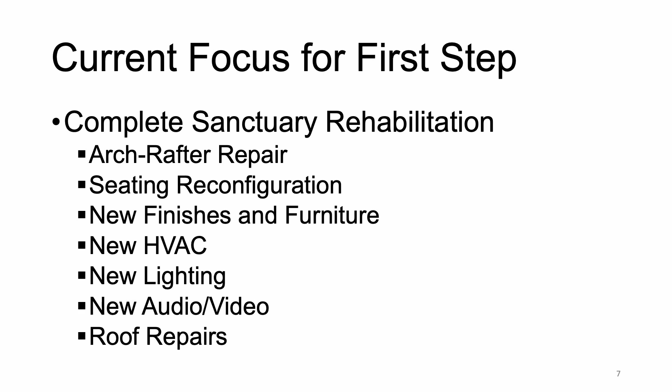That would include the repairs of the rafters, as we've discussed, but a new seating configuration that would have new finishes and new furniture involved, both seating as well as worship furniture, new heating, ventilating, and air conditioning system for the sanctuary, new lighting, new audio video equipment, and much needed repairs to the copper roof above the building.

This is a quick conceptual plan of what we're thinking about for the seating for the sanctuary, moving the altar space a little bit out into the seating area, creating more of a theater in the round feel.

Eliminating the raised altar platform, eliminating the planter area that's behind the altar currently, and providing a lot more open floor space for more functional and flexible use of the square footage we have.

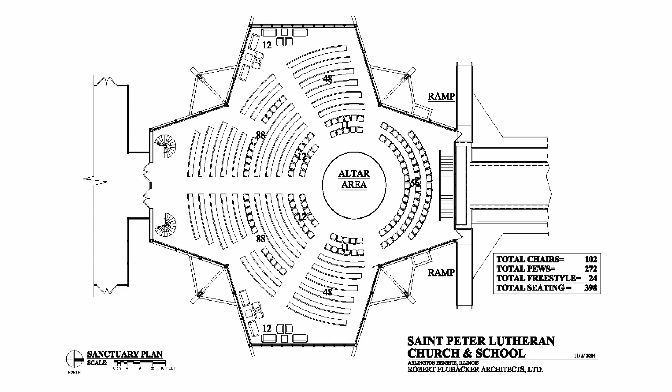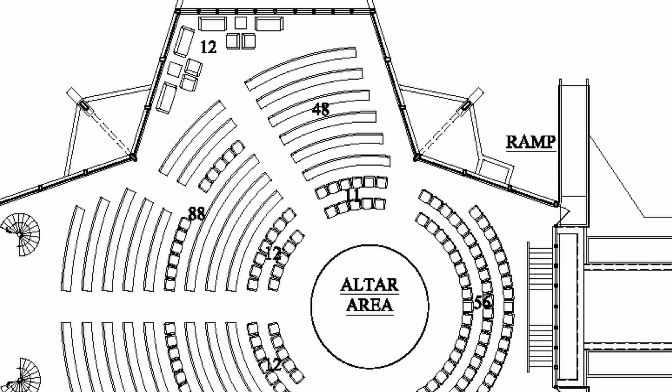If you look at the plan, there are 3 different types of seating involved. There are individual chairs that make up the first couple of rows of the main body of seating, as well as rows behind the altar area, kind of where the raised platform is now. There is fixed curved pew seating, and then there are also some leftover areas of space where we could do some more informal seating, where a family might sit together, or just more casual seating.

With that, we have also discussed a master plan approach to developing the next phases of work on the facility. The next set of slides is a very crude first attempt at what that master plan is. It's by no means set in stone, but I just wanted to present what the current thinking is.

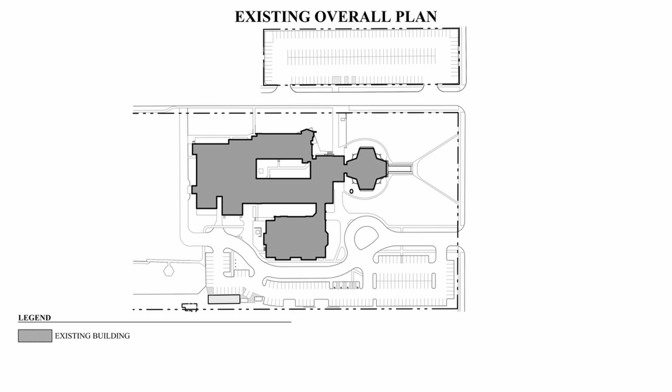The next slide shows what would be a potential next phase beyond that. That includes areas such as letter C on the plan, which would be a new lobby addition. Letter D is a canopy over that new west circular drive to provide a covered drop-off for people coming into the facility. Letter F on the plan refers to a new school wing addition, basically on the west side of the MAC and the gym.

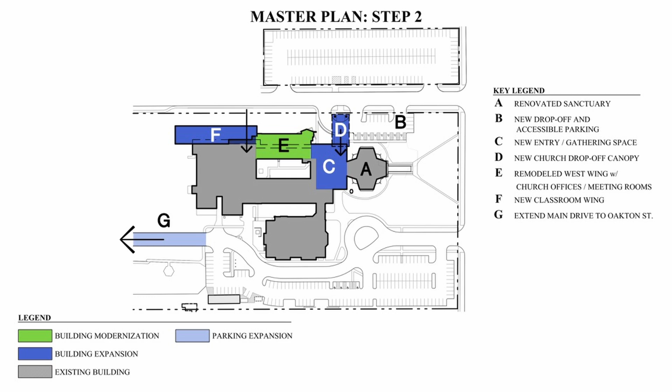We need to build this to house the students before we do renovation to any parts that they're in. Through a lot of discussion, it seems that it would be more practical and probably just as economical to build new classrooms rather than try to renovate the existing classrooms and have those students displaced for a year while those classrooms are being renovated.

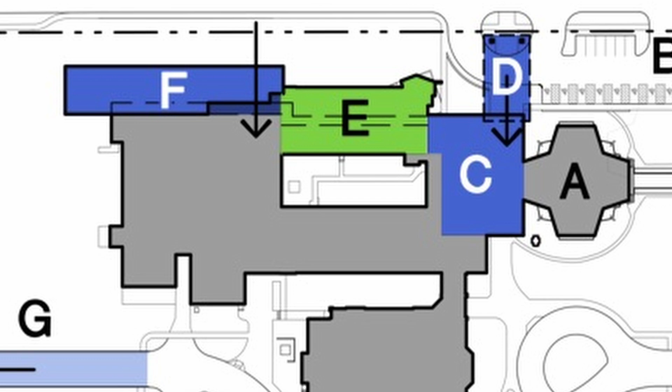Once that section F is constructed, it would replace the west wing of the school, which the proposal is to renovate into church offices and public meeting rooms, meeting the need for that meeting space outside of the envelope of the school.

The next slide would show what a phase after that could be, which is adding yet another school wing, letter J on this diagram. That would then allow us to tear down the east wing of the school in order to expand the central courtyard and provide a very open, protected, safe outdoor space for gatherings, for children to play, just kind of a multi-purpose protected outdoor space. And then letter H on the plan is some additional preschool classrooms built basically directly next to the Life Center.

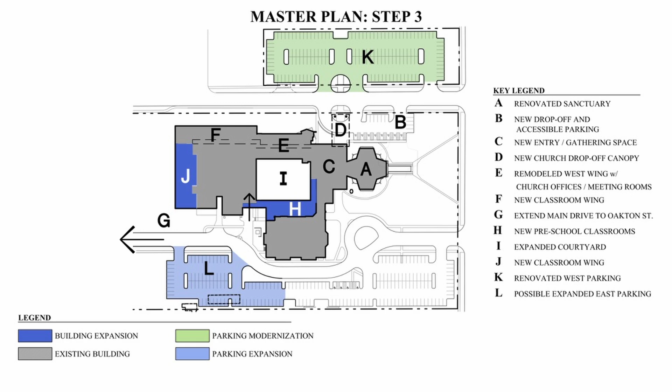Through all of this work, we would provide handicap accessibility to all the various levels. Anything new that we would build would match the floor levels of existing buildings, so it should be relatively simple to accomplish that.